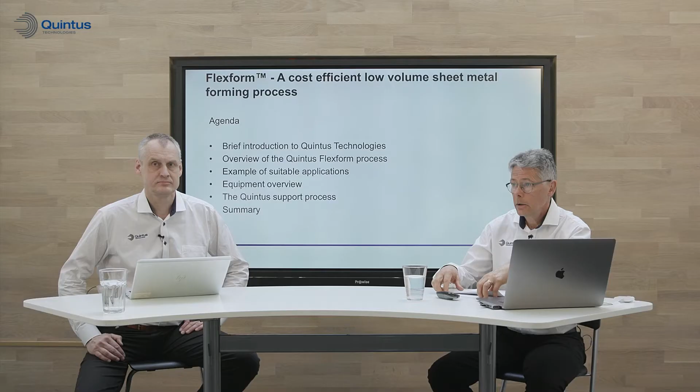Today we'll talk about the Quintus high-pressure Flexform technology. We'll discuss the versatility of the technology and in particular the values to the low-volume vehicle industry. We will discuss the capability to cut and eliminate tool cost, and we will also look at how to reduce lead times. During the event we will also demonstrate a few examples and we will dive into details on three different components.

The agenda for today will give you a brief introduction of Quintus Technologies, and then we'll give an overview of the Quintus Flexform process. Then we'll make a deeper dive into different applications, with at least three examples that we'll present to you. We'll give you an equipment overview, and before we summarize we will also discuss the Quintus application support process.

Quintus Technologies is a high-pressure company. To generate and to contain high pressure is the core of the company. For us, 2000 bar is high pressure, or 200 megapascal or 30,000 psi. When applying such pressure over a large forming area, it turns out to be a press force up to 150,000 ton for our largest press sizes, to give you some perspective.

We specialize in the design, the manufacturing, the installation and the support of high-pressure equipment all over the globe. We specialize in advanced material densification and in sheet metal forming.

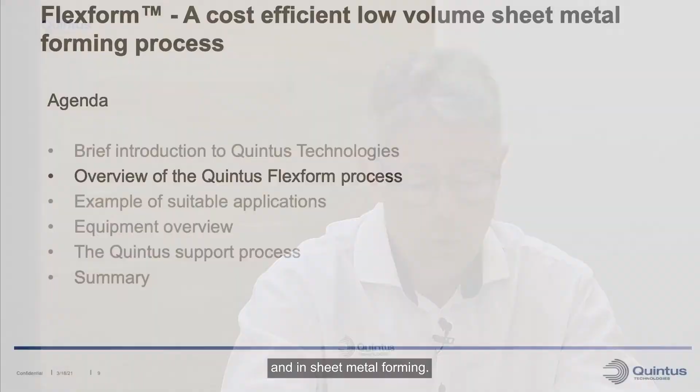Let me give you an overview of the Quintus Flexform process. When operating with the Flexform process, we use only one rigid tool half, the other being a flexible rubber diaphragm, pushed down by the hydraulic pressure.

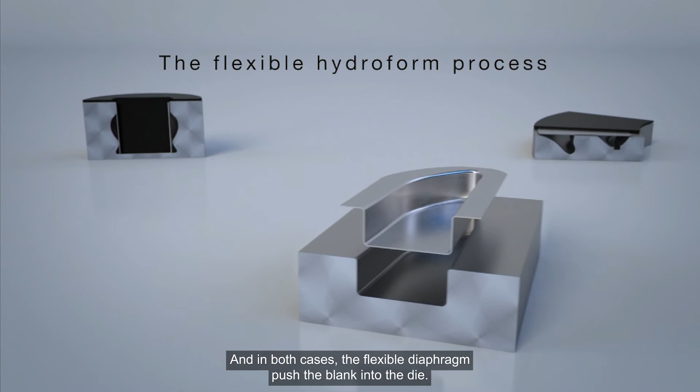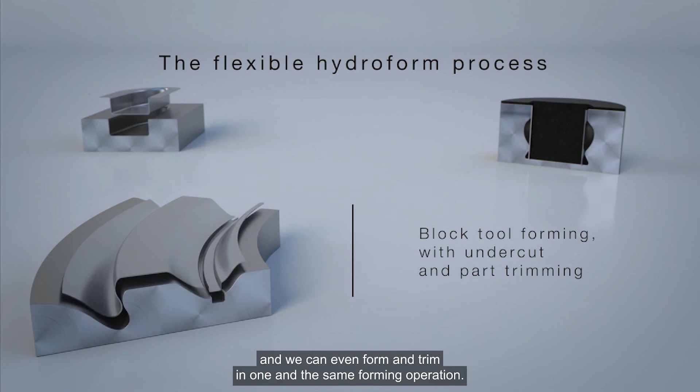We can work with different types of tools. We can work with cavity dies, and we can also work with block tools, and in both cases the flexible diaphragm pushes the blank into the die. We can form intricate shapes, double curved surfaces, undercuts, and we can even form and trim in one and the same forming operation. The technology can also be used for expansion forming. So all in all, the technology operates with one rigid tool half and the other being a flexible rubber diaphragm.

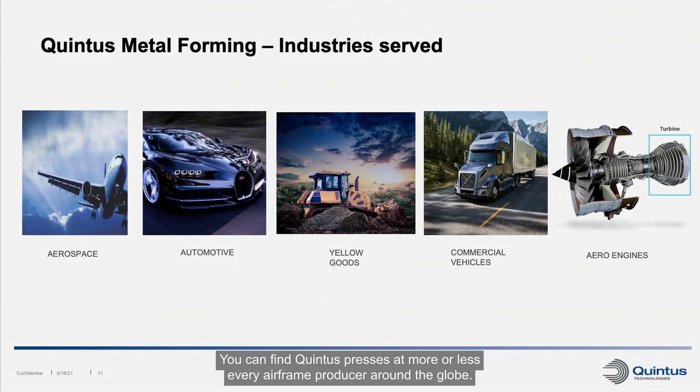The Quintus presses are used in many different market segments. In particular, the aerospace industry or airframe industry has used the technology for decades. You can find Quintus presses at more or less every airframe producer around the globe. It's very suitable because of the relatively low volume of production of airplanes, but with a big versatility of parts required in the industry.

Today, we will however concentrate on low volume production requirements in the vehicle industry, in commercial vehicles, in construction equipment, and also in the automotive prototyping arena.

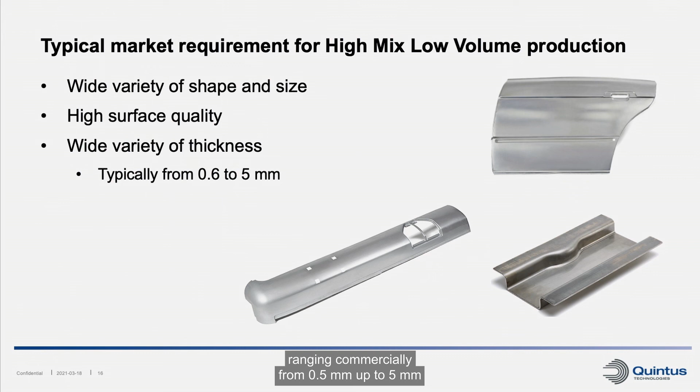So typical market requirements in this segment would be a wide variety of shape and size. It would be high surface quality requirements, and also a big requirement for variety of thicknesses, ranging commercially from 0.6 millimeter up to 5 millimeter, and requirement for many different alloys in the industry, everything from aluminium to mild steel and also high strength material.

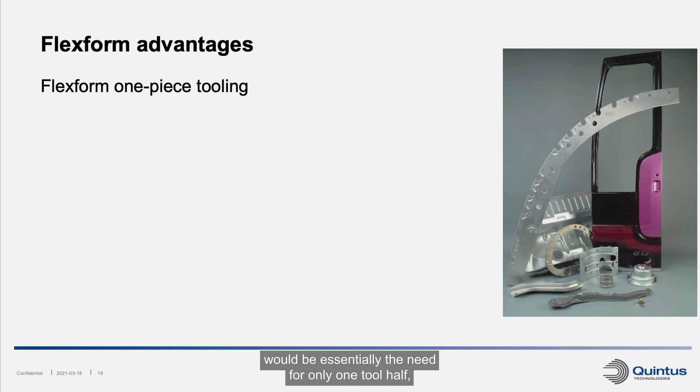The Flexform advantages in this industry would be essentially the need for only one tool half, meaning that you can cut tool cost, and a tool cost saving in the order of 50% is very common, and even all the way up to 90% tool cost reduction can be made in relation to two-piece dies.

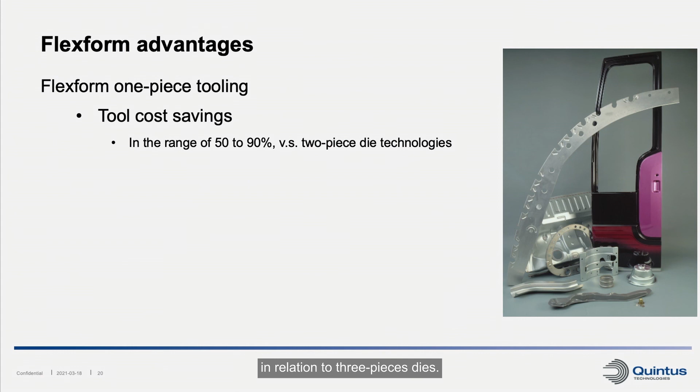Lead time reduction, again, minimum 50% lead time reduction, and we'll talk a little bit more about that today as well. Surface quality, because of the flexible rubber diaphragm, it's an opportunity to reach very high quality on the surface of the blank. And last but not least, you can operate with multiple tools in one and the same forming operation with this technology.

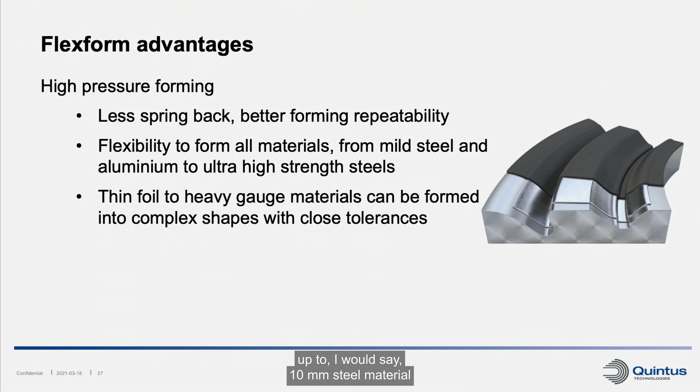The high pressure advantage: we see less spring back, we see better forming repeatability when we use high pressure versus low pressure. And we also get a possibility to form a big variety of materials because of the high pressure. Also thicknesses, we can go all the way from thin foil up to, I would say, 10 millimeter steel material with close tolerances on the forming.

Some customer references. Here we have a statement made by the Ford company, by Mr. Erik Riha, and he states: I have personally been involved in the fluid cell technology for over 20 years, and I have not found a better technology for the creation of sheet metal parts. The versatility, the speed, the cost, and the quality of the fluid cell press is unrivaled.

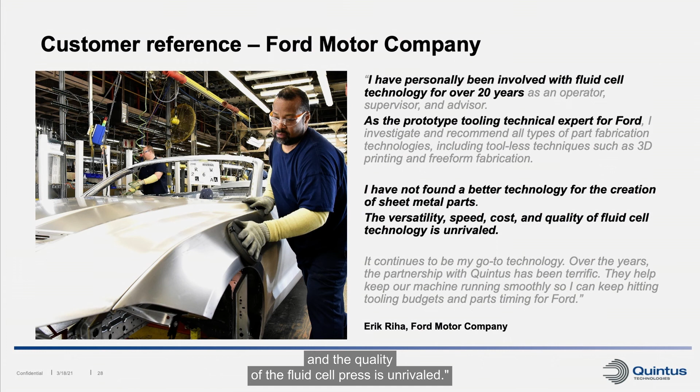Pretty strong statement by Ford.

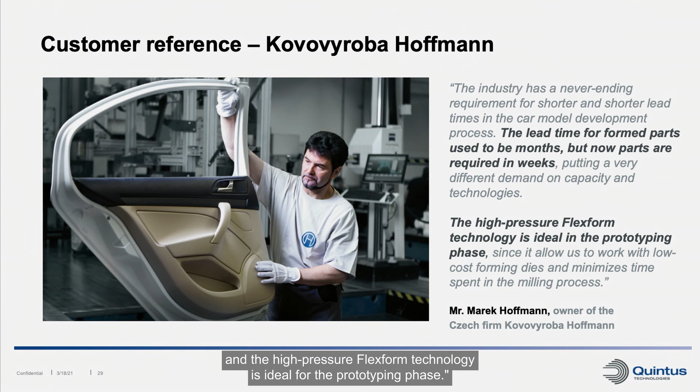Another statement from a company in the Czech Republic, the Hoffmann company, points a bit more on lead time reduction, where Mr. Hoffmann states that lead time for formed parts used to be months, but today the requirement is more weeks than months. The high pressure FlexForm technology is ideal for the prototyping phase.

I had the opportunity to interview Mr. Leif Norman at the Jobro company, and let's listen to what he says.

Welcome, Mr. Leif Norman, welcome to this meeting. May I ask you to first introduce yourself and your company to the viewers?

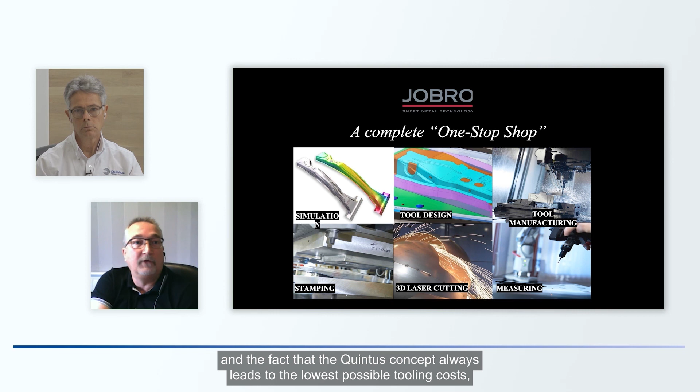Yes, I'm Leif Norman, and I'm representing Jobro Sheet Metal Technology. Jobro is a Swedish-based service provider with two production plants, one in Jönköping and the other in Ulricehamn. Our business concept is to be the preferred partner for prototype and low volume production, and the fact that the Quintus concept always leads to the lowest possible tooling costs makes the technology the heart of our production concept.

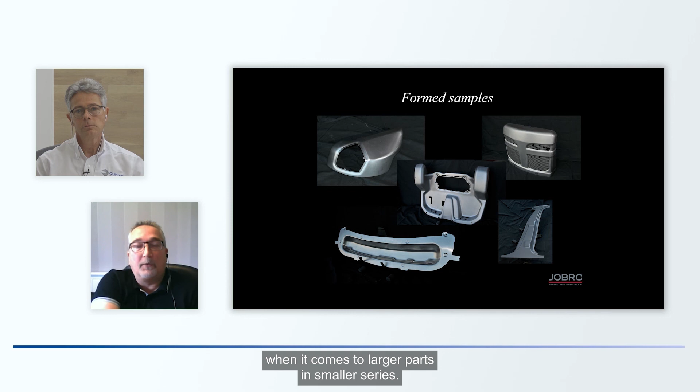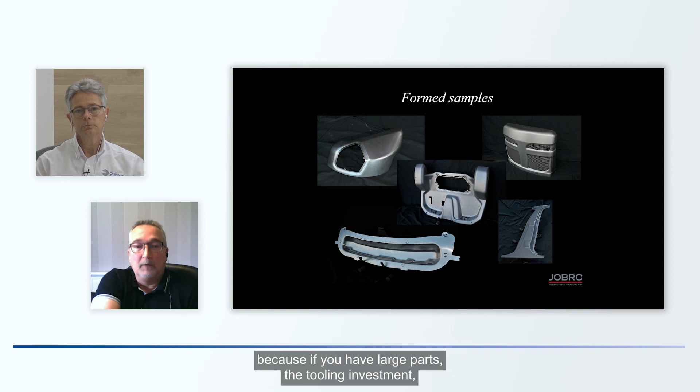The Quintus technology is superior when it comes to larger parts in smaller series. The larger the part, or the smaller the series, the bigger the benefits with the Quintus technology solution. If you have large parts, the tooling investments are extremely expensive in conventional methods, but it's a lot cheaper with the Quintus alternative. So large parts in extremely low volumes are very, very good in Quintus. For a volume of 10 to 15 pieces, the Quintus technology is absolutely superior - there's nothing else to compare with, or cheaper.

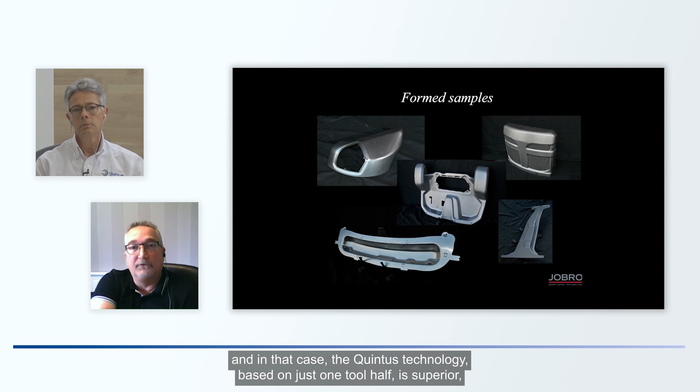So, cost - how about lead time? Both cost efficiency and lead time are superior, and also the flexibility. When doing prototypes, you often reach a stage where you need to change something in the design. In that case, the Quintus technology, based on just one tool half, is superior because it's quite cheap and very rapid to implement changes.

Thank you very much, Mr. Leif Norman of the Jobro company.

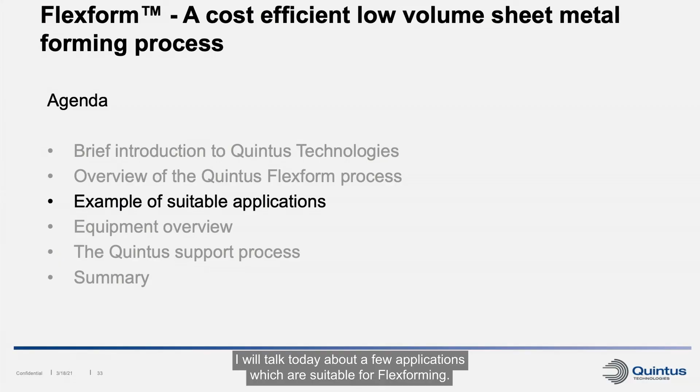The next topic for today would be different applications, so I hand over to Björn Karlsson. Thank you, Sture. I will talk today about a few applications which are suitable for Flexforming. We have chosen three product groups to discuss: light structural parts, outer skin panels or visible parts, and finally heavy structural parts. I will go through these application groups in some detail.

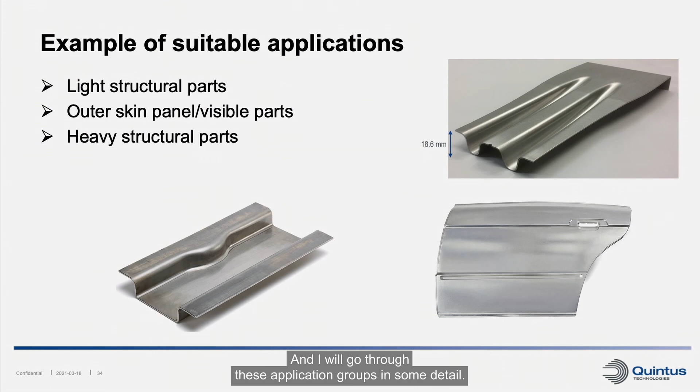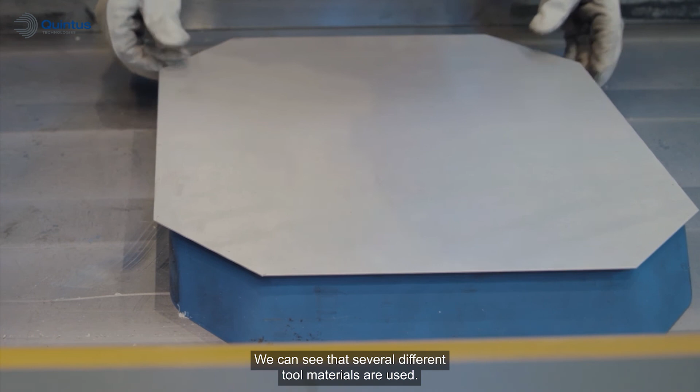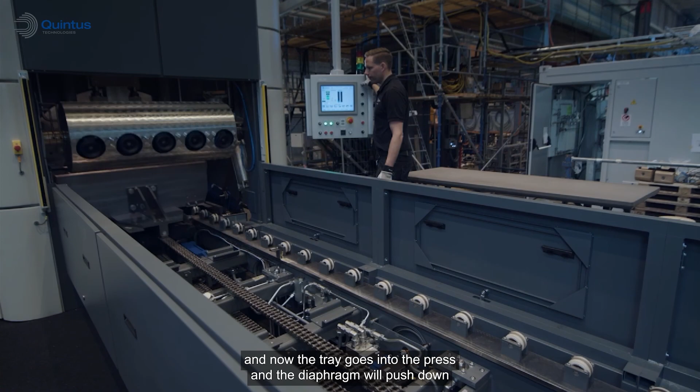We will now see how this looks in the real world. We have here a tray with tools, and the blanks are put on top of the tools, then the diaphragm comes down and pushes the sheet material into the die. We can see that several different tool materials are used. The tools are placed quite freely in the tray, and now the tray goes into the press, and the diaphragm pushes down on the sheet and on the tools.

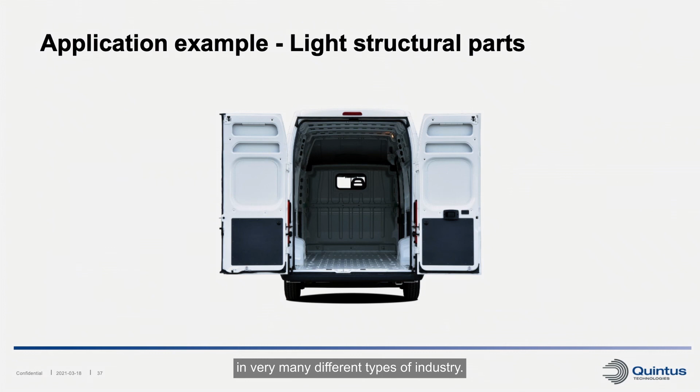So we move to the section with application examples, starting with light structural parts. This is quite a wide area - we can find such parts in very many applications across many different types of industry. We've chosen here as an example the inside of a light truck, where you can see quite a few of those parts visible: the inner structure, door reinforcement, beams and girders which are perhaps not visible, but all of them are suitable parts for flex forming. Not only light trucks, but pickup trucks, buses, and utility vehicles of different types are areas where we find this kind of application. What's typical for them also is that very many times they come in quite low numbers and in quite a few different models.

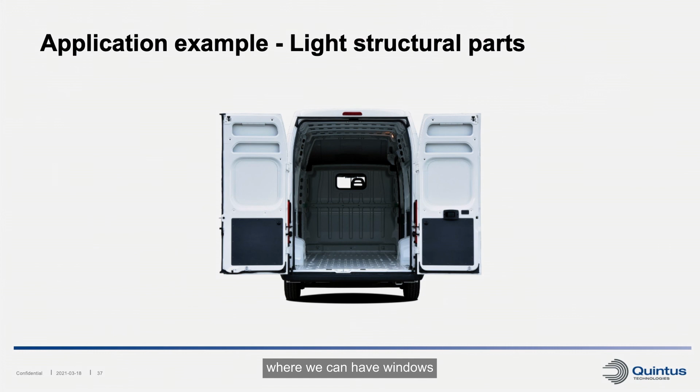As an example of this, we can look at the rear door in this case, where we can have windows, and where some purchasers don't want windows - this of course requires two different tools and lower numbers of the produced part. This means, since tool cost per part is important, this is one more advantage for flex forming.

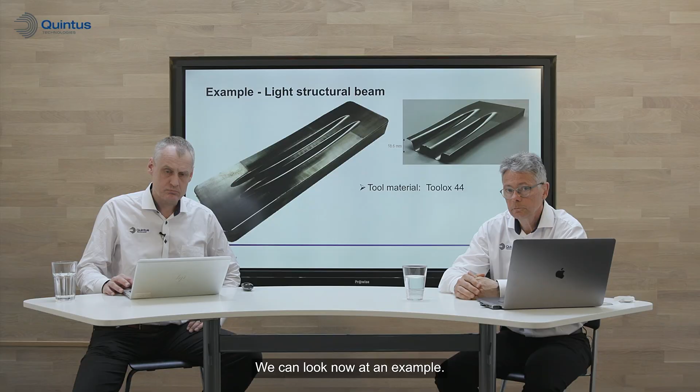We can look now at an example to show how suitable flex forming is for this kind of part. We've made a demonstrator tool in our shop which can be used for very many different materials and thicknesses. The tool itself is made of pre-hardened tool steel, Toolox 44, and it costs about 3,000 euros to produce. The measure of the tool is roughly 650 by 200 by 50 millimeters. Also what we can see in this example is how quickly it can move.

From the day we receive the drawing until we can show the first formed part can be within a week, if we make sure that we do everything in sequence.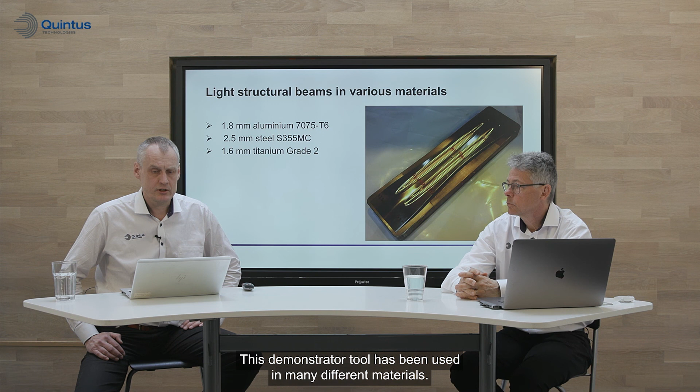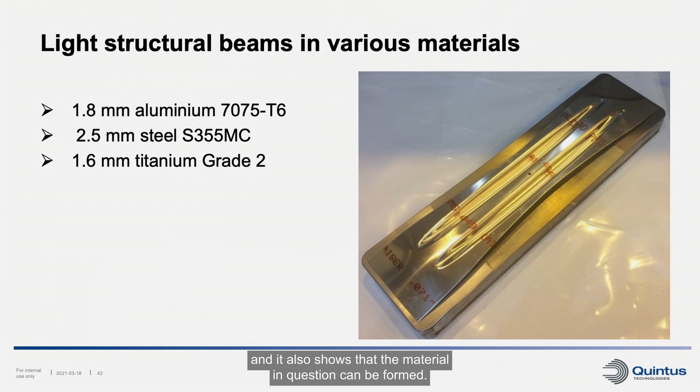This demonstrator tool has been used in very many different materials. It's not a part which exists in the real world, it's just something that shows this can be done in very different materials and thicknesses. It's not compensated for springback, which means when we try these different materials we will have a varying degree of springback for each one. But it shows that the part can be formed, and that the material in question can be formed. I have with me a few examples.

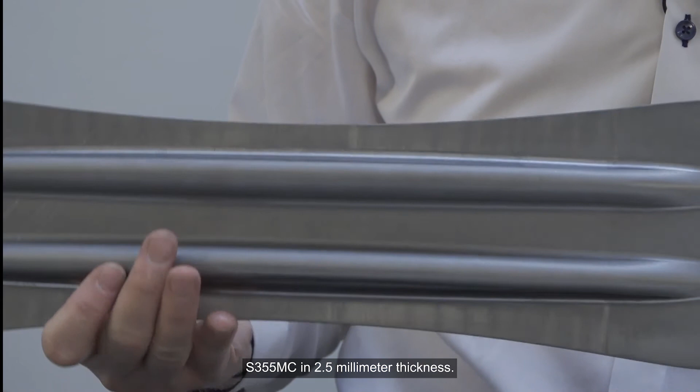This is a steel part, S355MC in 2.5 millimeter thickness. We have also used the tool to press high strength aluminum, 7075 in T6 temper - a very difficult temper to form. You can see the springback is quite significant, but we can form the material.

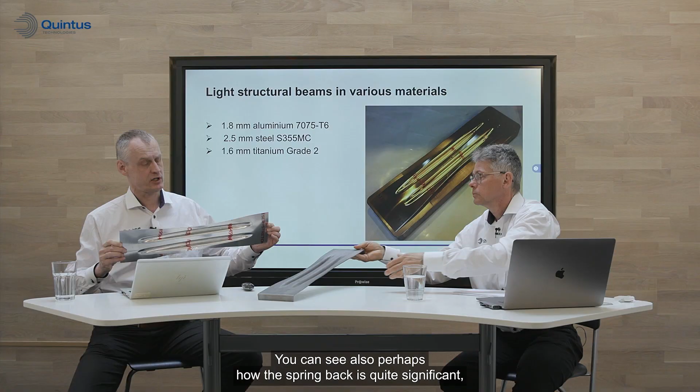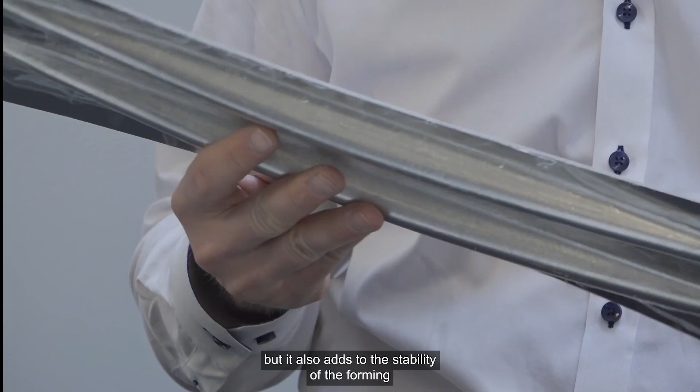You may also see in the picture that we have still the plastic left on the blank, and this serves a twofold purpose. First, we protect the part from scratches when we leave the plastic on, but it also adds to the stability of the forming because we get some lubrication from this plastic.

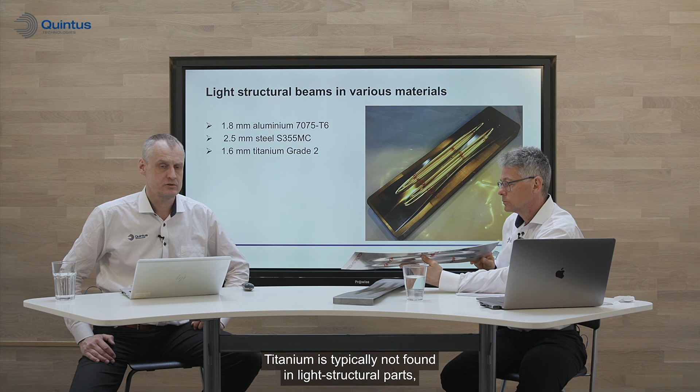We have even tried titanium in this tool. Titanium is typically not found in light structural parts in those application fields we have discussed. The main point is just to show that it works.

We would like to show also that it can be simulated. It's not a difficult part to simulate, but we like simulations also from another point of view, because we have difficulties seeing inside of the press what happens. Simulations actually give us, for the first time, an understanding of what happens to the material when it's inside the press and exposed to this very high pressure.

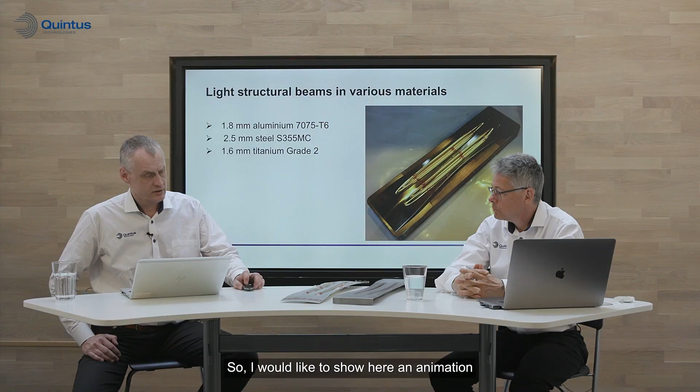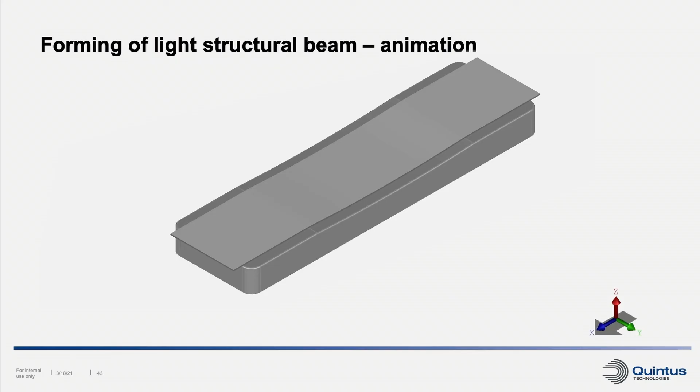And when the pressure increases more, we see that the central stiffeners are also formed. This simulation is made for 2.5 millimeter 355 material, which was shown here. This is a moderate high strength steel, so we don't see so much springback after forming of this part.

I would like now to move to another applications example, namely outer skin panel or visible parts. This is also an area where we, in very many different segments of industry, can find interesting applications - not only moving things like cars, buses, vehicles of different types, but also white goods, for instance, have a very high requirement for surface quality. This is one of the fields where flex forming is very suitable because of the flexible diaphragm.

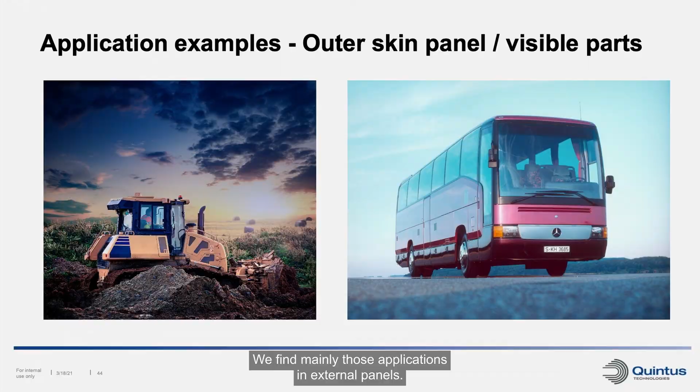We don't have an upper tool. We form the part with the diaphragm, which comes down and makes sure that the forming is very gentle. We don't have the possibility of an upper tool which scratches the part. We find mainly those applications in external panels, of course, things that are visible, but also internal panels, and as I said, white goods are also quite often of interest.

We have chosen an example here, which is an outer door panel for a convertible car. In this case, of course, we need to have excellent surface quality - there can be no scratches on this part.

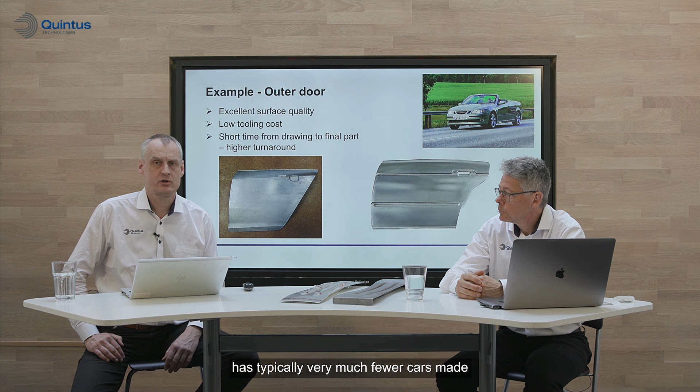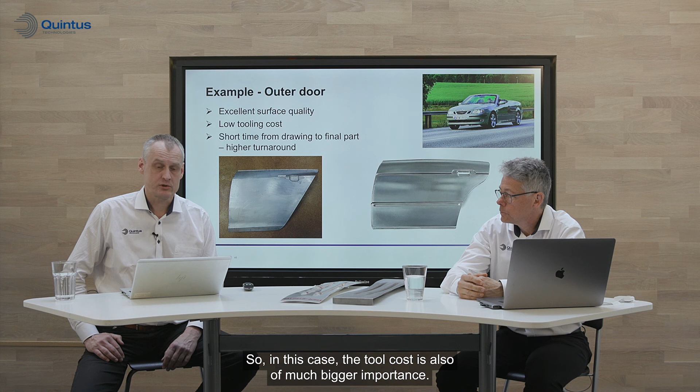It's also interesting that this application has typically very much fewer cars made than conventional cars with roof, so in this case the tool cost is also of much bigger importance. We need to have a low cost of the tools per part, which is fulfilled with flex forming. And finally, it's interesting to have a high turnaround - it should not take a very long time to produce the number of parts and to move to the next project.

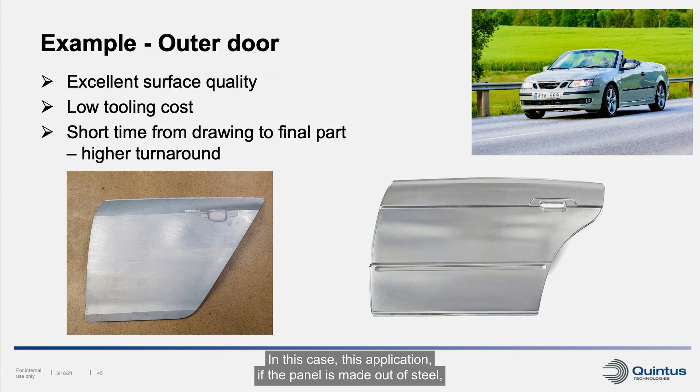In this case, this application - if the panel is made out of steel - we many times need a certain amount of stretch in the material. There's a process called bake hardening, when the part hardens a little bit during the painting operation. For this to happen, we need to have a certain amount of stretch in the material, and this is no problem for us. Since the diaphragm comes down and stretches the material into the die, we automatically get this stretch, which means that bake hardening issues are typically not existing.

We also get the additional advantage that the diaphragm stretch prevents oil canning - we don't have unrest in the material. Sometimes if a panel is only slightly formed, we can have unrest, so-called oil canning. But this is something that we can easily avoid, since the diaphragm will stretch the part into the tool.

We can see an example of this in the next slide, where we have also shown an animation for you to better see what actually happens in the flex forming process. In this case, the forming is done in 2 steps.

We start with a pre-forming, where not the full pressure is applied. We go down only so much, so we see that the material is in contact with the whole part. When this preforming step is done, we trim, and then the final forming step is made, where the flanges and all the sharp radii are formed.

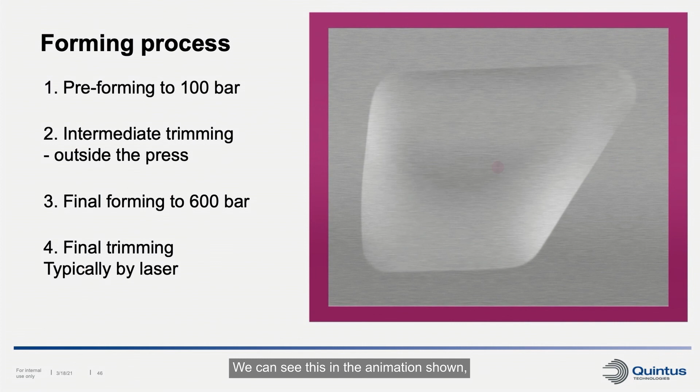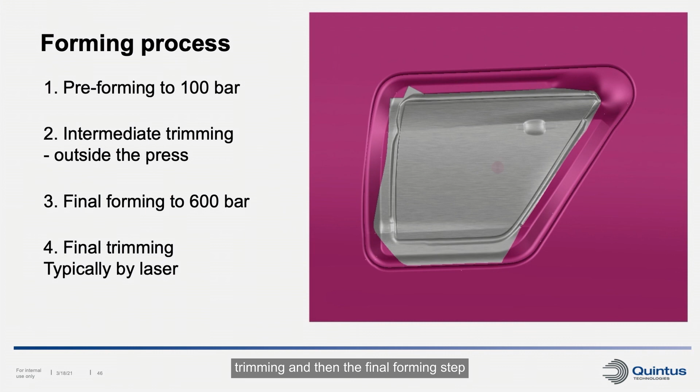We can see this in the animation shown, where now the preforming happens. We see the material being stretched into the die, trimming, and then the final forming step, and then the final trimming. In this case, the intermediate trimming and the final trimming was not made in the press.

We also typically see much less problems with wrinkling in flex forming compared to conventional sheet metal forming. This is also due to the diaphragm, which is in contact with the sheet and keeps the material pushed against the die so that wrinkles will not occur.

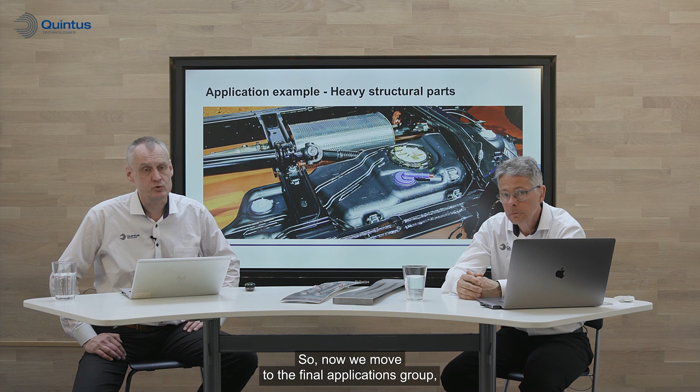So now we move to the final applications group, heavy structural parts. Maybe first we should say that there's no sharp distinction between heavy structural parts and light structural parts. It's mainly where they are used and the thickness of the material which is the distinction. The parts can look quite similar, but when you move up to maybe 5 millimeters or even above, we talk about heavy structural parts. Typically the border between the 2 applications is around 3 millimeters.

Many such parts can be produced in a bending machine, but we also see a lot of applications where we have curved parts, or features like hole expansion or other design features which are difficult to make in a bending machine. And then we see the great use of Flexform machines, parts that cannot be produced in a simple bending machine. In the picture we see a few examples of such parts.

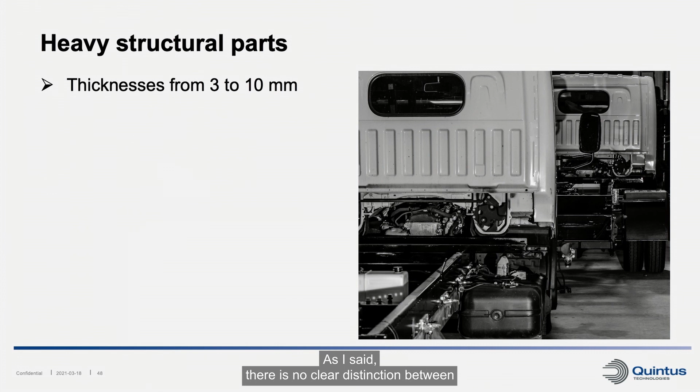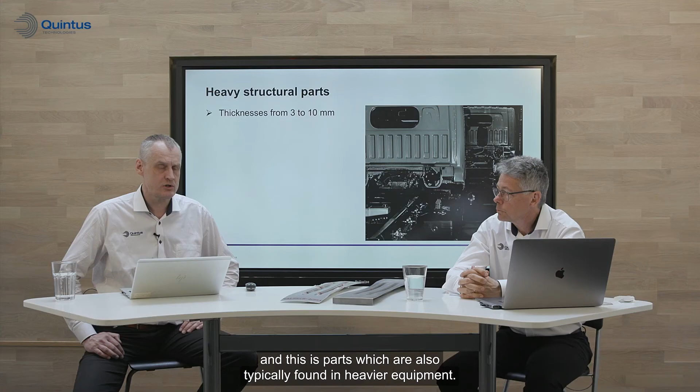As I said, there is no clear distinction between when a part is a light structural part and a heavy structural part. We, from experience, say that from about 3 millimeters and upwards, we talk about heavy structural parts. This is parts which are also typically found in heavier equipment. It can be truck chassis, it can even be trains, forest machines. This is where we find such applications.

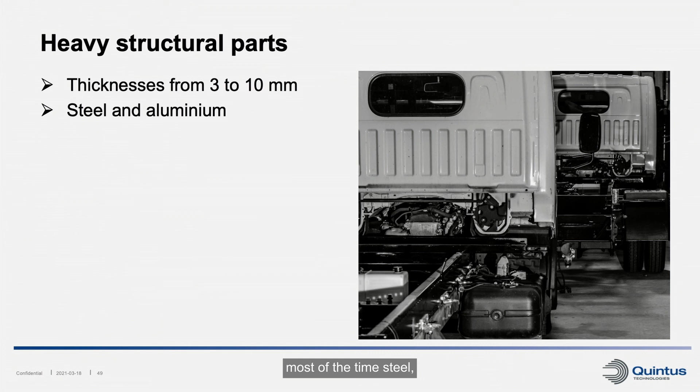Materials in this application field are most of the time steel, aluminum also to some extent, but not so many other materials are actually found. And strength-wise, we actually have applications which have gone up to very, very high strengths, up to 1500 megapascals.

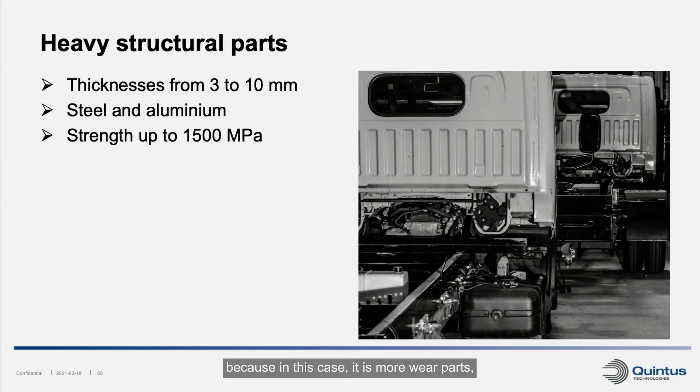But in this case, maybe we shouldn't talk more about structural parts, because in this case it is more wear parts which are the application. But what's important to remember is we can work with such materials. There is no limit in strength or in thickness actually.

We also have for this application field an example. We've made a tool to produce heavy structural beams. In this case, we have made beams in 5 millimeter S355 MC, which is a high strength steel. In this case, we could actually also use the tool with higher thicknesses.

We have the inner surface, or the inner area of the part, is what is determined by the tool, but we could use 4 millimeter or 5 or 6 millimeter in the same tool.

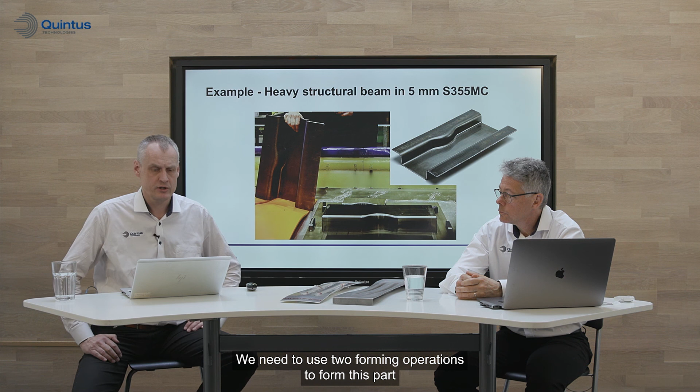This part is made in 2 steps. We need to use 2 forming operations to form this part. And you can also see in the picture that this part is not so easy to make in a bending machine because of the curvature of one of the flanges. So this is an application where we see advantages in using Flexforming.

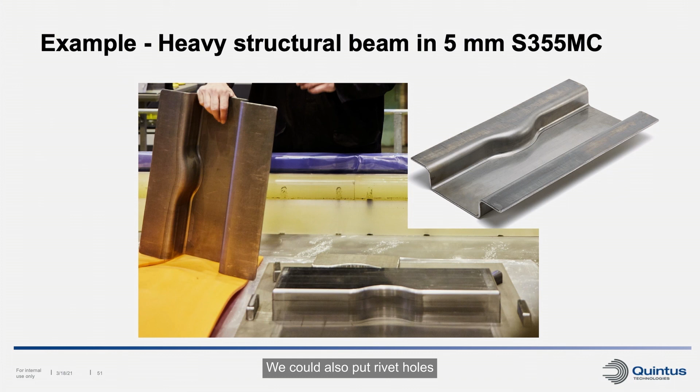We could make the part with straight edges. Now we have left the flanges, but we could use a blank which is slightly smaller so that we produce just a C-shaped beam. We could also put rivet holes in the blank before forming. We see in this kind of applications very often that people are afraid of fatigue, so such applications are very often bolted or riveted together. And there is no problem with Flexforming to add those holes before forming,

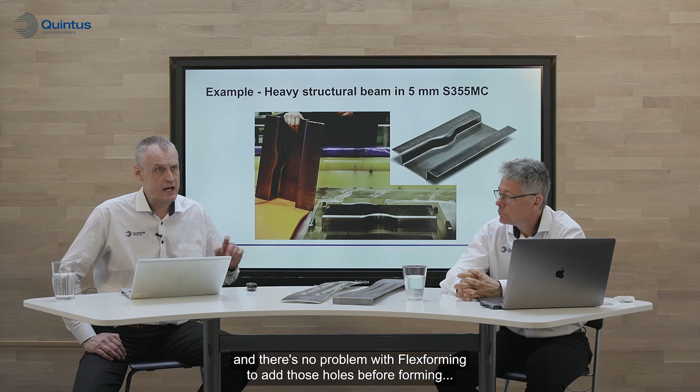because we don't have the hydroforming lubricant or the hydroforming liquid in contact with the sheet, just the diaphragm.

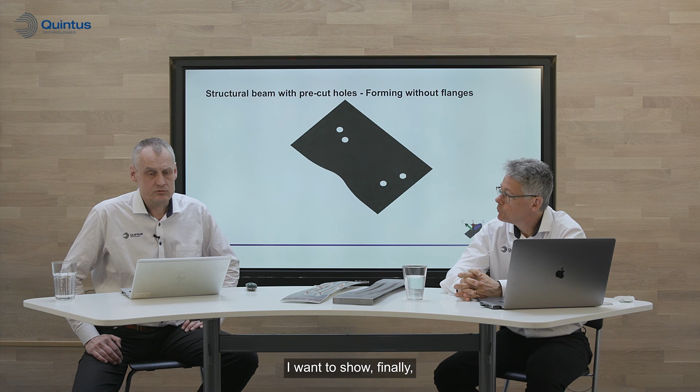I want to show finally also in this case a simulation of this part where you can see how it is, or how it can be formed also without the flanges. And we just put in some holes to show also that it's possible to put the holes in before you start the forming operation.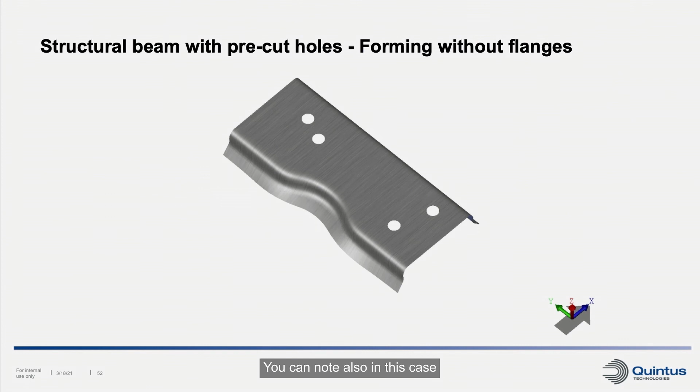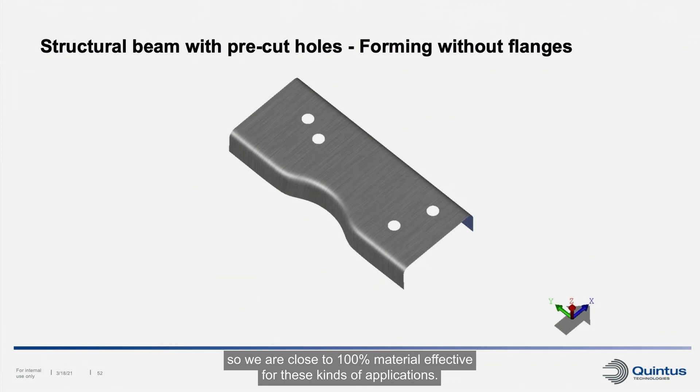You can note also in this case that if we use a pre-cutting of the blank, we can arrive at almost 100% material effectiveness. There is very little extra machining necessary in this part, so we are close to 100% material effective for this kind of applications.

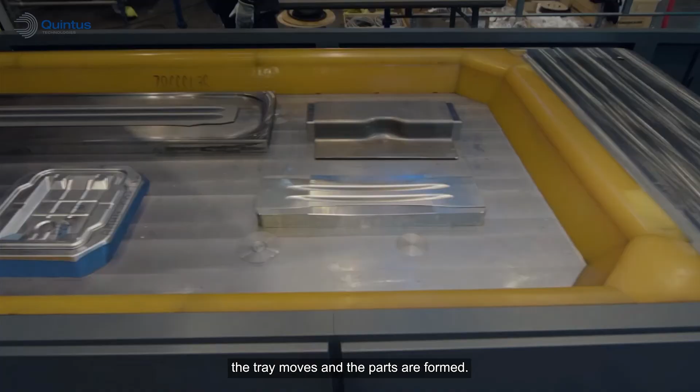So we move back now to the movie which we saw some time ago. In this case, I would like to stop and explain a little bit more of what we actually see. So we see now after forming, the tray moves out and the parts are formed. Here in the center of the picture is some kind of panel which is formed in a plastic tool, and please note also that the part is cut in the tool in the forming operation.

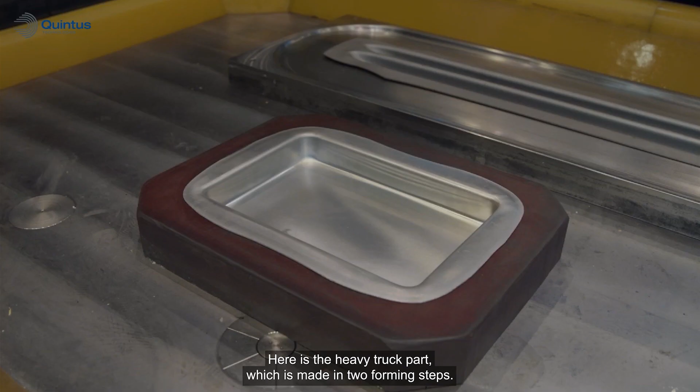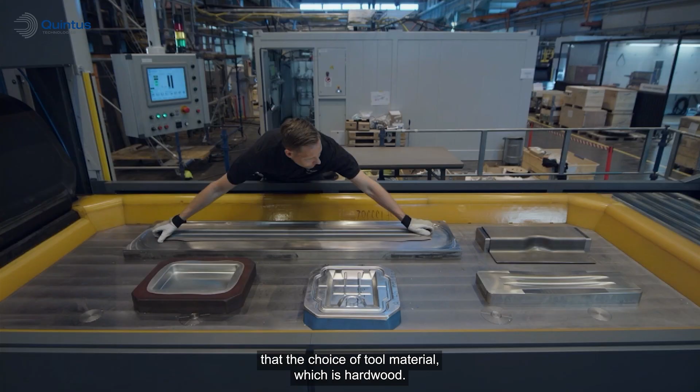Here is the light structural beam, just some aluminum material here. Here is the heavy truck part, which is made in 2 forming steps. All the others are made in just 1 forming step. Here's a panel, and note also here the choice of tool material, which is hardwood. So many times we can use such tool materials. And then we see finally a light structural beam.

And then I give the word back to you, Sture. Thank you very much, Björn. Very interesting. So let's go to the next topic then.

I will give you an overview of the Quintus equipment. So we manufacture two types of machines, you can say. One with a rectangular forming area, or forming table, or tray as we normally call it, and the other being with a circular table.

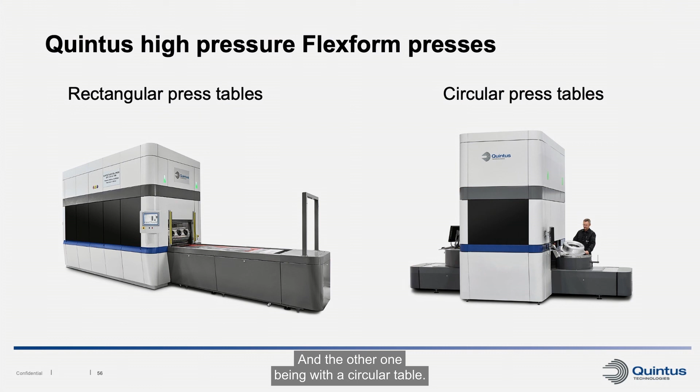So to summarize, if we look at the type or size of machines, we have a starting point at a forming area of 700 millimeter by close to 2 meters in length. And for such a machine, there will be a press force of 15,000 tons. So that's our starting point.

And then we can stepwise go up in size from 700 millimeters in width to 1 meter, all the way to nearly 2 meters in width, and lengthwise from 2 meters to 3 meters to 4 meters. And for the biggest machines, the press force by the high pressure is then up to 132,000 tons. So it's quite a lot.

The width will also give you the depth or the tool height. So if you have a need for large parts in depth or high parts, then also the width is an important factor to bring into the equation.

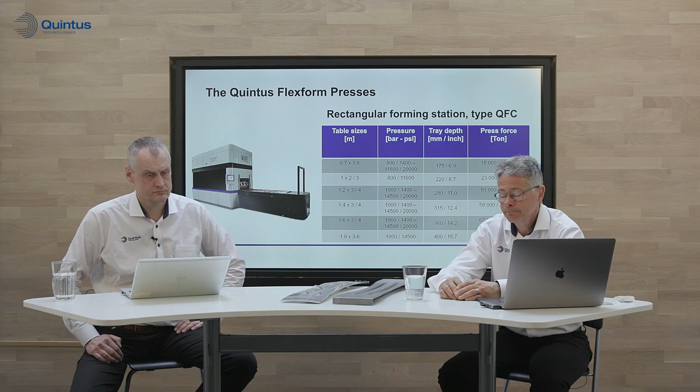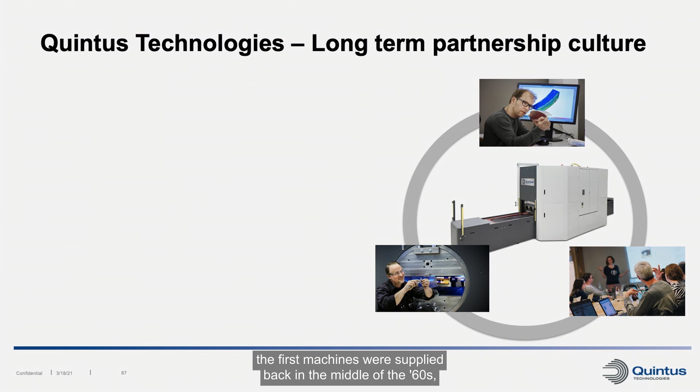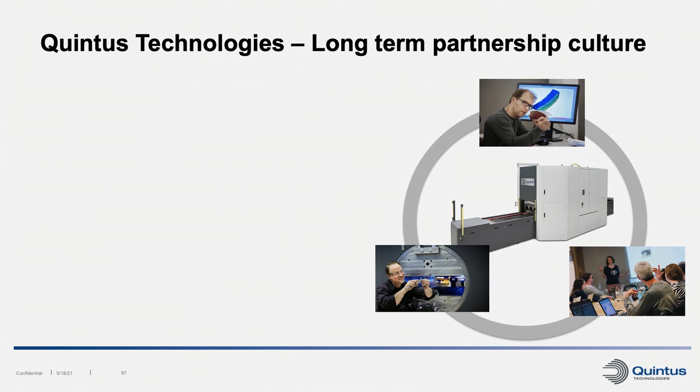The Quintus support process. Let's give an overview of the support process. Quintus Technologies is really built on long-term partnership. As I've said a couple of times, the first machines were supplied back in the middle of the 60s, meaning that once we install a machine, that's a starting point of a very long partnership with our customers. Equipment-wise, we have numerous records of firsts when it comes to new product development and introduction to the market, and I would say the company is very much driven by technology and engineering development.

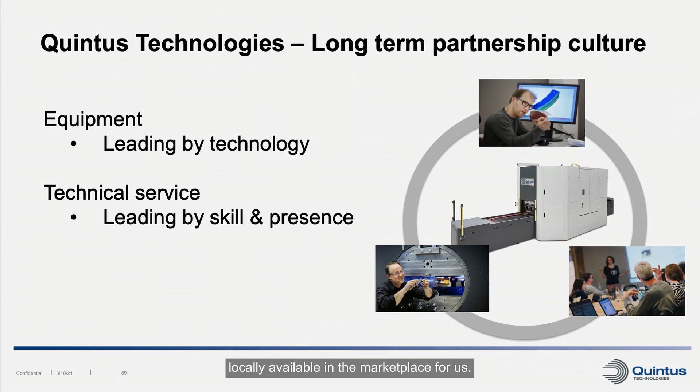Secondly, technical service is key to us. It's very important to have skilled service technicians locally available in the marketplace for us. But again, long-term commitment between the two parties is also of essence. And we offer today a strong service organization all over the globe.

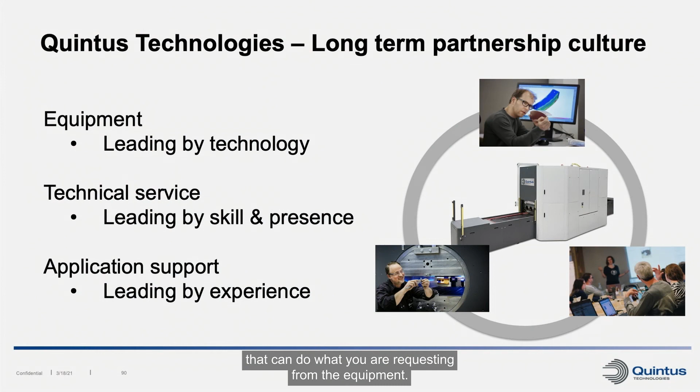Last but not least, the application support, as we call it, our capability to talk the customer language, meaning that being experts also on forming is of essence to us. We think you will find us a good partner when it comes to forming, tool design. We discussed forming simulation earlier today, so that's also important for us. But it's also important as a link back to our engineers, how to always continuously further develop equipment and introduce new machine models that can do what you are requesting from the equipment.

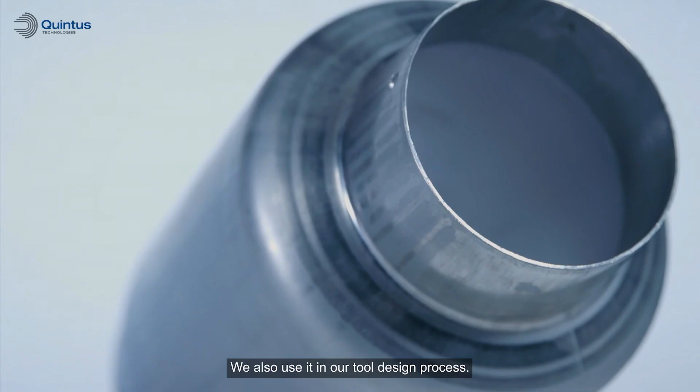Forming simulation is a very important tool for us. We use it for evaluating the feasibility in projects. We support customers with forming simulation. We also use it in our tool design process. We've done numerous tests with customers, showing different opportunities with the technology. We work with different alloys, we work with different tool materials.

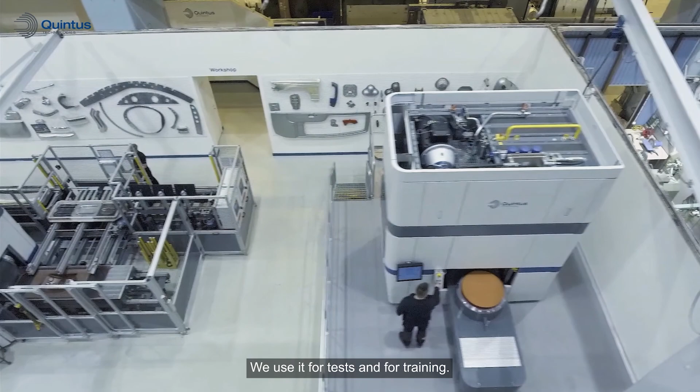And we also have an application center where we have the latest equipment available. We use it for tests and for training, and we'd also love to see you visit us when time allows, so we can prove our capacity.

So to summarize, the Flexform technology is a cost-efficient process for low-volume production. It's excellent or ideal for low volume, where you have a high mix of different components, different parts. It can be light structural parts, as we discussed today, but it can also be skin panels, and it can be heavy structural parts.

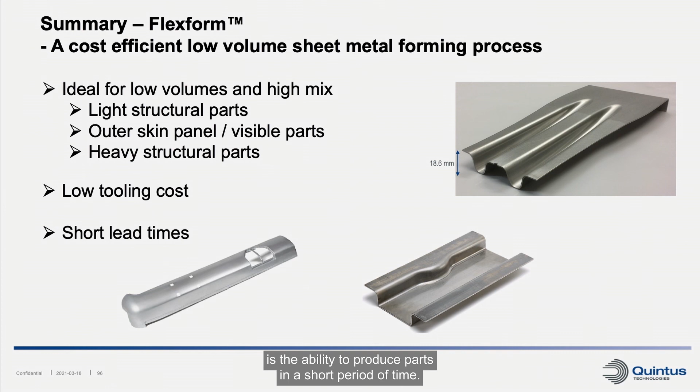And the key benefit, really, we come back to that, is the low tooling cost. But also, perhaps as important today, is the ability to produce parts in a short period of time. So the lead time to develop new projects is a very strong point in this technology.